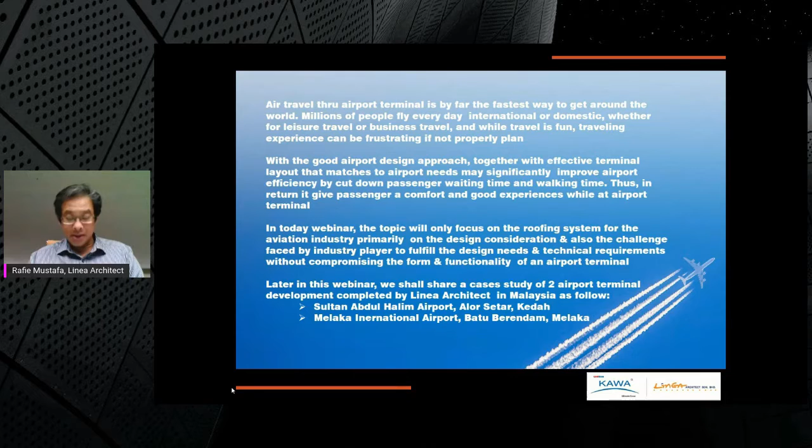Ladies and gentlemen, there are three subject matters to consider when choosing a metal roof system for an airport terminal building. One, to meet the architectural design requirements. Second, to meet the technical performance requirements. And last but not least, to be able to fulfill client requirements. Okay, first, let's go to the use of metal roof systems to meet the architectural design requirements. These are the considerations to look at, as you see on the slides.

First, the roof system is able to adapt to the architect's design needs, whether a tapered, curved, or straight roof design. In other words, metal roof is flexible to the design needs and the architect's design intent. Second, it is able to cater to a low roof pitch angle design, in other words, virtually flat, as minimum as a 1.5 degree pitch in some cases.

Third, the metal roof deck is capable of spanning continuously with fewer connections or joints. Fewer joints means high integrity and 100% watertight. Number four, another point to look at is aesthetics. It has a sleek, bold, expressive look, yet it has a good roof build-up system, and the important thing is it's economical. The next point I want to bring is that the roof is a lightweight system, but gives a strong, rigid, and lasting appearance.

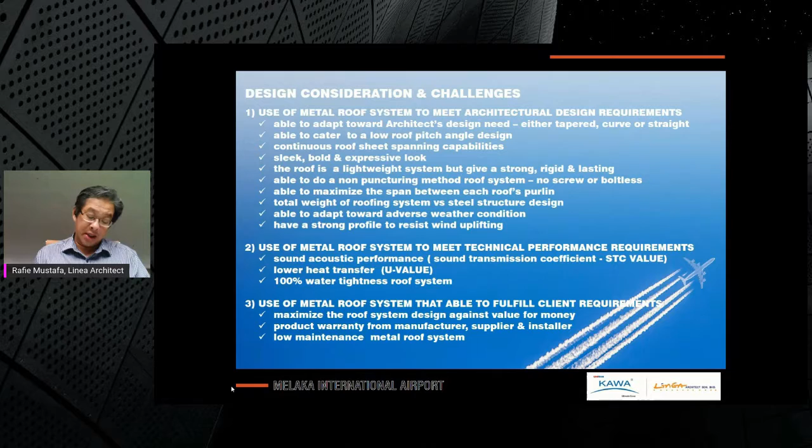With this, the right performance and configuration on roof build-up shall be able to bring comfort and safety towards the passenger, and also able to minimize the operation cost to the building operator, especially on electricity consumption.

And finally, the third subject matter to consider when choosing a metal roof system for airport terminal building is the use of a metal roof system that is able to fulfill the client's requirement. Here, I put 3 points to look at. First, it is able to optimize the roof system design value for money.

In other words, the right method and choice with an optimum design approach contribute to the economical and lighter weight of the roof system.

Second point that I want to bring up is a product warranty from manufacturers, suppliers, and installers, which gives a reliable, trusted source. These are things that the client looks at too.

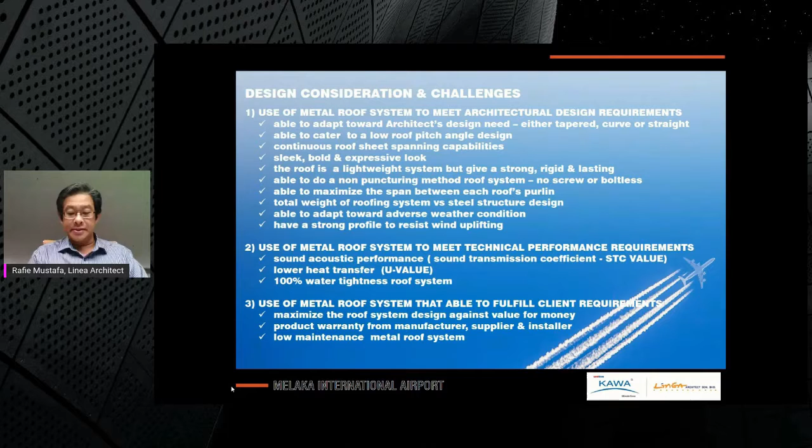And last but not least, another point I want to bring up is to have a low maintenance roof system. With three subject matters to consider when choosing a metal roof system for airport terminal - architect design intent, client requirements, together with technical performance - the benefit in return will give:

1. Save energy, 2. Give comfort, 3. Provide safety and security, 4. Minimize the maintenance, and lastly, optimize the design value for money.

On the next slide, I shall share 2 case studies of airport terminal development completed by our office, Linea Architect in Malaysia. First, as you see on the slide, the development of Sultan Abdul Halim Airport at Alor Setar, Kedah.

Completed at the end of year 2005, development was executed in 4 phases. Phase 1, earthworks and runway construction. Phase 2, construction of the air traffic control tower. Phase 3, construction of piling works for all buildings.

And phase 4, construction of the main terminal building, transfer corridor building, VVIP annex building, airport fire rescue service building, central utility building, landscape and infrastructures.

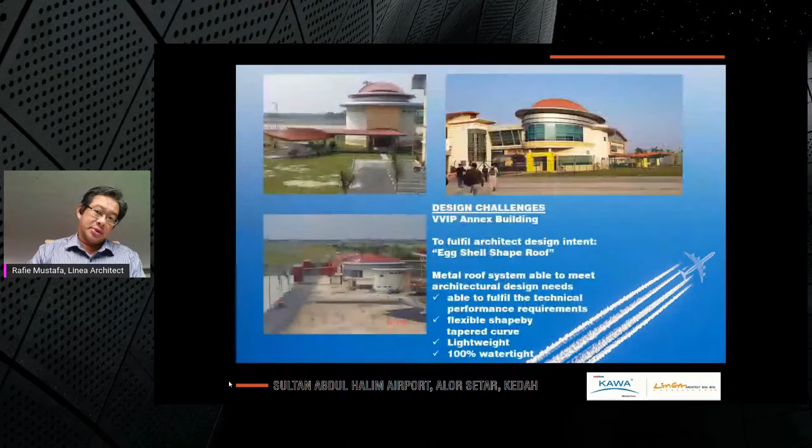Ladies and gentlemen, on the next slides I will share a photo of the VVIP Annex building at the Sultan Abdul Halim Airport Terminal. Here the architect has designed the roof shape as a totally different entity and exclusivity compared with other buildings, as you can tell by the name VVIP itself. So the approach by the architect was to design an eggshell-shaped roof, and this has given a challenge to choose the right type of roof profile and method of construction.

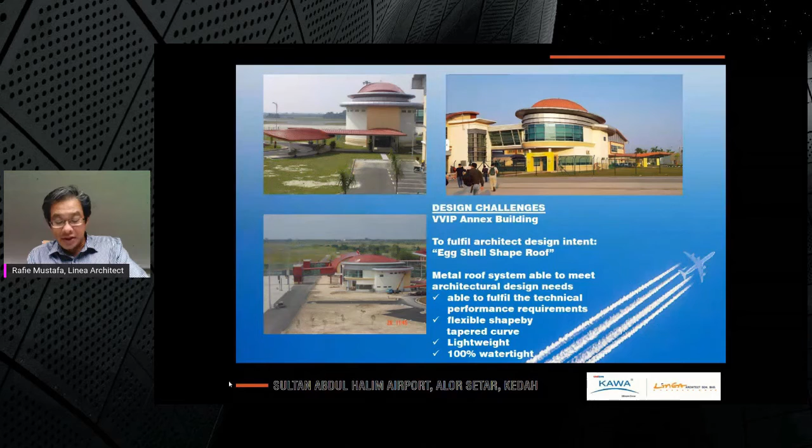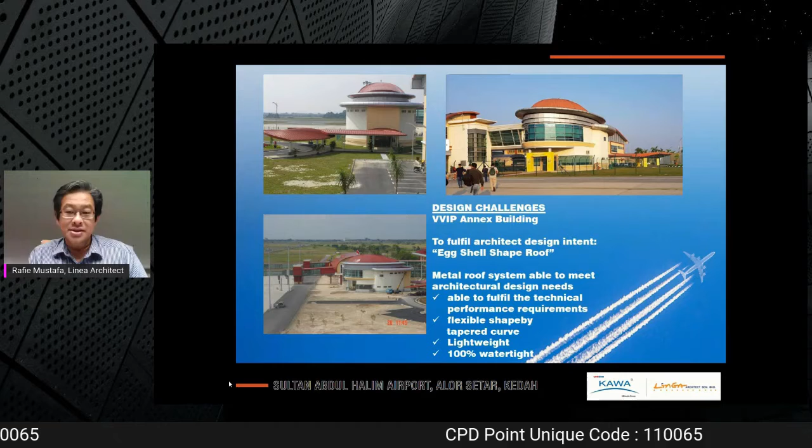However, again, with the flexibility of metal roof, it is able to be shaped and constructed in a tapered curve without having to compromise the performance of the build-up roof system, and importantly, give 100% watertightness. This has resulted in a very unique design, and the challenge is resolvable due to the flexibility of the metal itself.

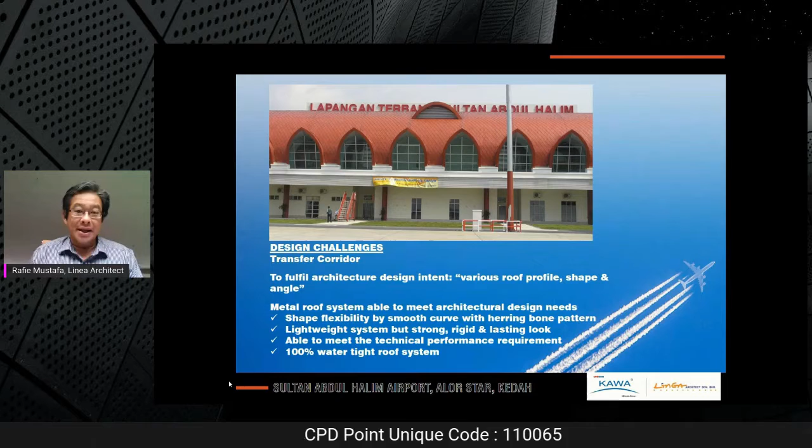Ladies and gentlemen, on the next slides I will show the photo of the transfer corridor building at the Sultan Abdul Halim Airport Terminal. Here, again, the architect has designed the roof shape in an extreme curve in many ways, and the roof surface, if you look at it properly, has a pattern like a herringbone design. This too has given a challenge to choose the right type of roof profile and method of construction.

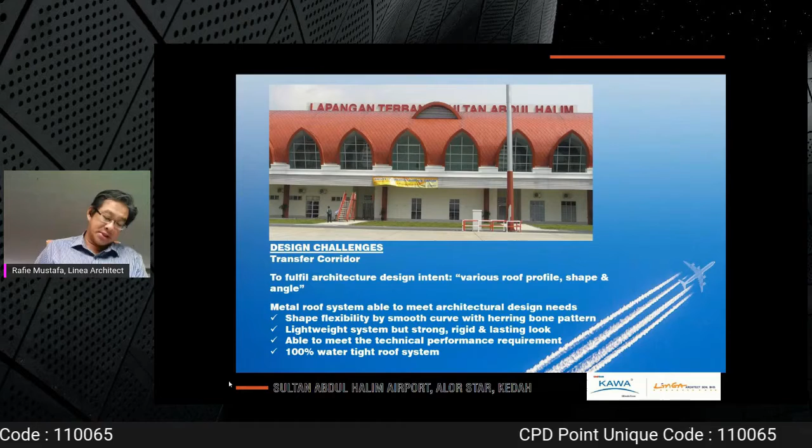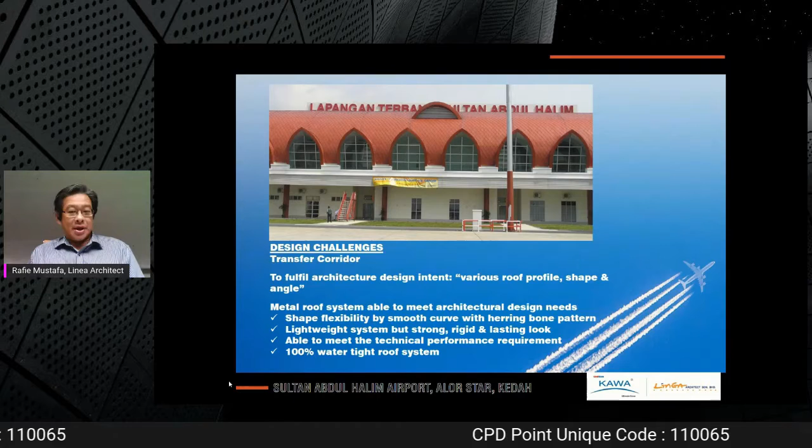Again, the flexibility of a metal roof allows it to be shaped and constructed in a curved shape without compromising the performance of the built-up roof system. And again, it gives 100% watertightness and has resulted in a unique building facade, when you approach or land at the Lapangan Terbang Sultan Abdul Halim.

Ladies and gentlemen, now on the next slide I will share the second case study of the airport terminal development, completed by Linea Architect in Malaysia, which is the development of Batu Berendam in Melaka, completed at the end of the second quarter of year 2009. The construction consists of the development of the new main terminal building, the air traffic control tower, airport fire rescue service building (AFRS), meteorology building, airport runway, and also the landscape and infrastructure.

Ladies and gentlemen, this is the aerial photo of the Melaka International Airport Terminal. The architect's design approach on the roof is to have a dynamic, sleek, strong, bold outlook, like an aircraft wing, and at the same time having a low-pitch roof angle.

With this design intent by the architects, it has given a challenge to choose the right type of roof system, and in summary, the metal roof system is the right method and choice to fulfill the architect's design intent during the course of design development as well as during construction.

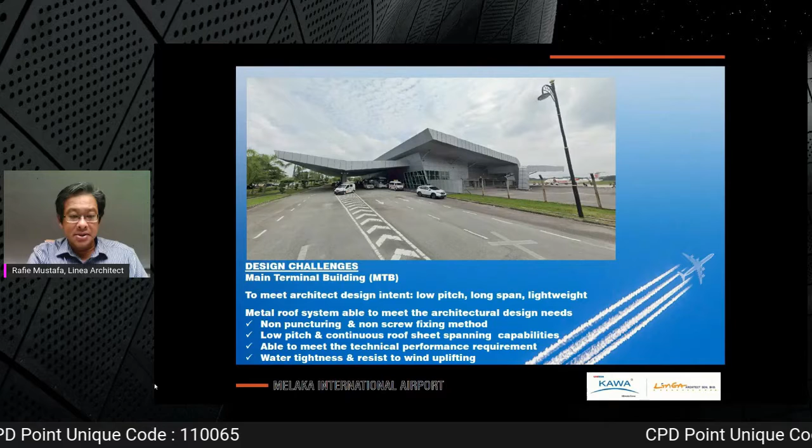The next slide shows the side view of the main terminal building of the international airport. Like I said, it is able to meet the architect's design needs. The next slide shows a closer look of the terminal entrance porch, which has a long, wide roof span that is able to cater to multiple vehicle lanes below the roof.

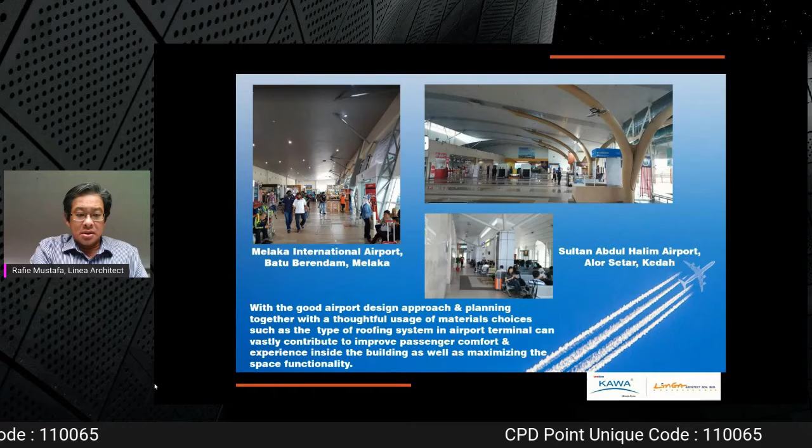Ladies and gentlemen, as a summary, for Melaka International Airport, Batu Berendam Melaka, and Sultan Abdul Halim Airport, Alor Setar Kedah, with the good airport design approach and planning, together with a thoughtful usage of material choice, such as the type of roofing system in airport terminals, this can vastly contribute to improved passenger comfort and experience inside the building, as well as maximizing space functionality.

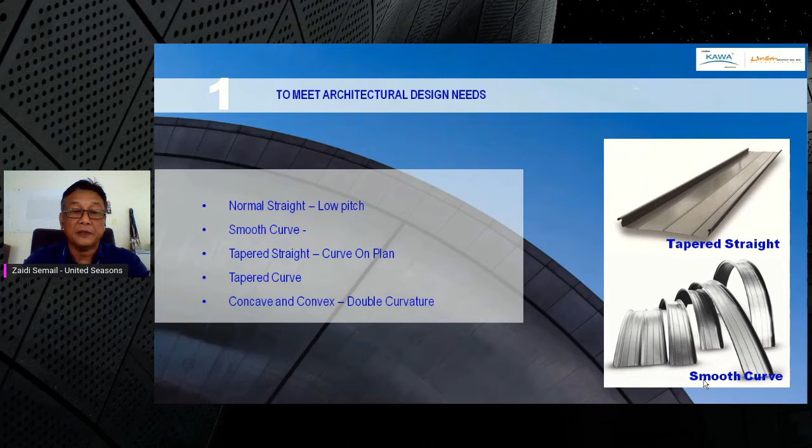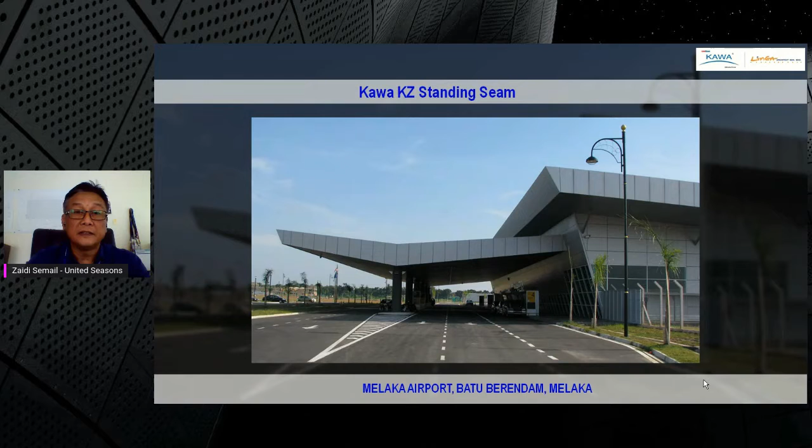This is the Kawa standing seam on Malacca Airport, the project we did with Encik Rafie, which is a very flat 2-degree pitch at 60-meter length. For example, we also have the Area Sultan Abdul Halim Airport in Kedah, which is a smooth curve with double curvature, and also has a very good STC and U value, which we'll talk about towards the end.

This is a smooth curve standing seam on a China Airline building. So architects would like to see something smooth, not this crimping, factory look-alike. So this is a better choice for all this design in the airport or industries.

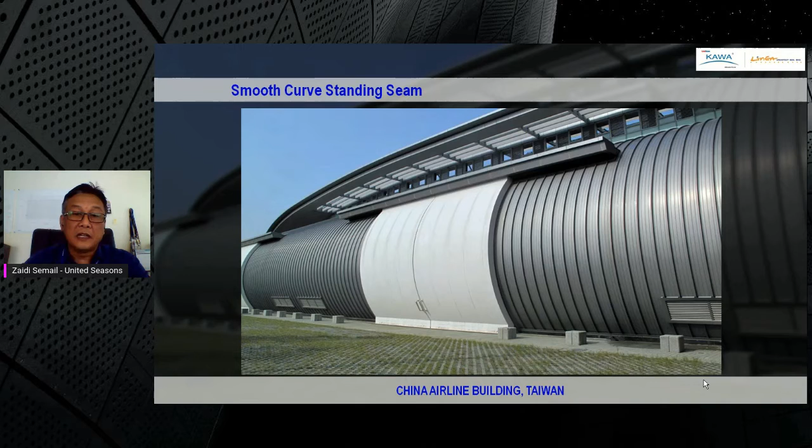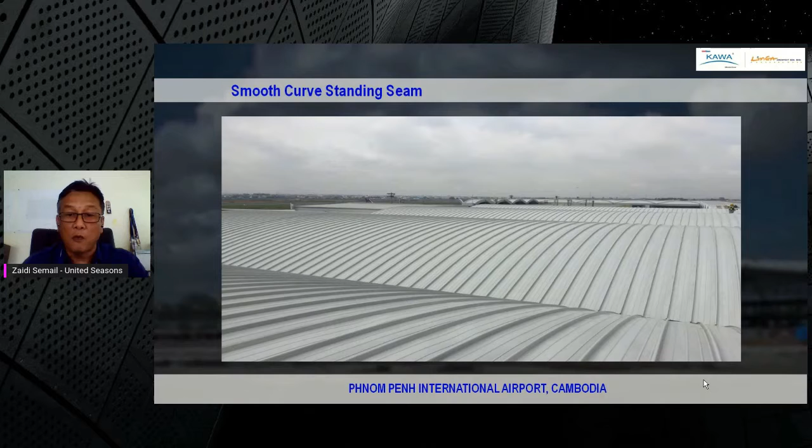Another photo of curved roofing on a building. I think just to let you know, most of the curve or long span is clearly better because there are no joints and no puncturing through, and it will have a very good flow of water at the end of the design itself.

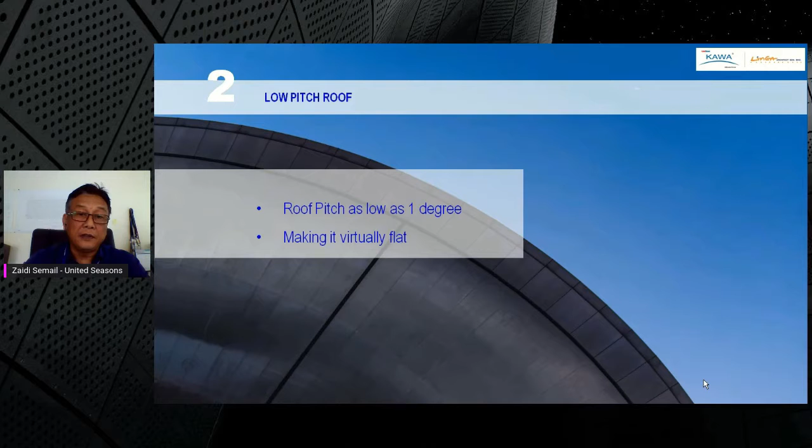Okay, low pitch roof. As mentioned by Encik Rafie just now, it's very important to have a low pitch roof, making it virtually flat. The reason you have to do this is that you must be able to use a product that's able to take care of the amount of water that flows on the roof itself before it reaches the gutters or beyond the roof itself.

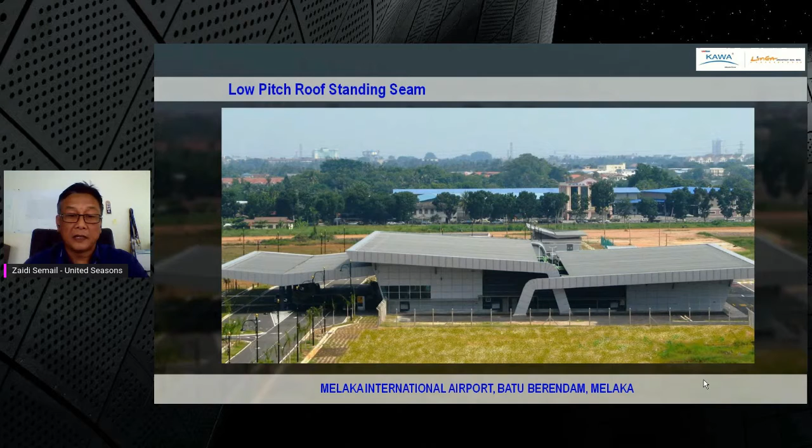All right, so low pitch. This is the section of the Melaka Airport, a low pitch roof. As you know, it's a 3-degree pitch, spanning around 60 meters, if I remember correctly. So it has to be able to take the amount of water in Melaka itself when it rains, before it moves to the gutter or the water collection.

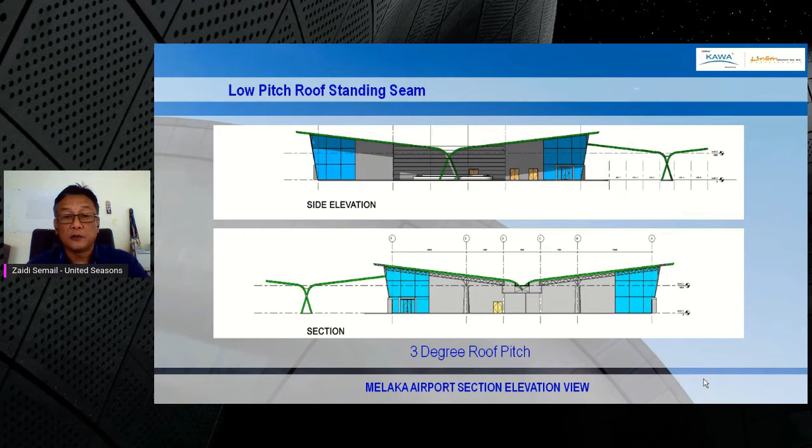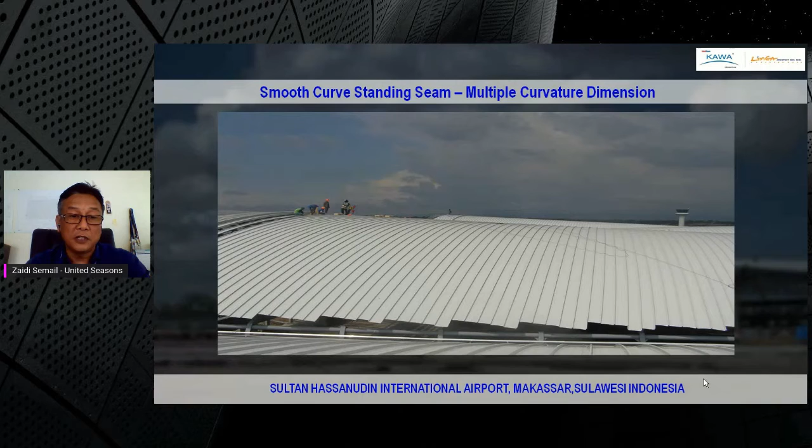I really like this smooth curve standing seam. I put there multiple curvature dimension because this is one of the designs in Sultan Hassanudin International Airport. When they design a conical shape, if you notice in the photos, every 5 pieces we have to change the radius just to meet the design of the architect. Moral of the story, listen to the architect.

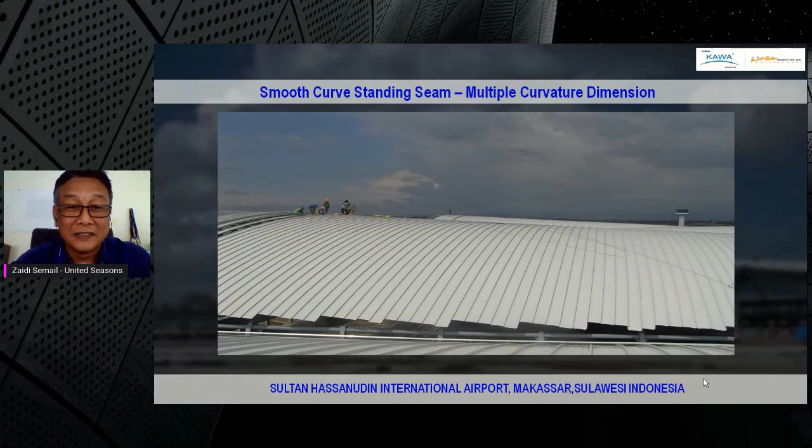All right. So continuous long length roof. Most of the time, architects don't like the roof that they design to have joints or a lot of cuttings, that kind of things. It is to eliminate the possibility of leaking as much as possible. And we have to produce one single piece, eave to eave, what we call it.

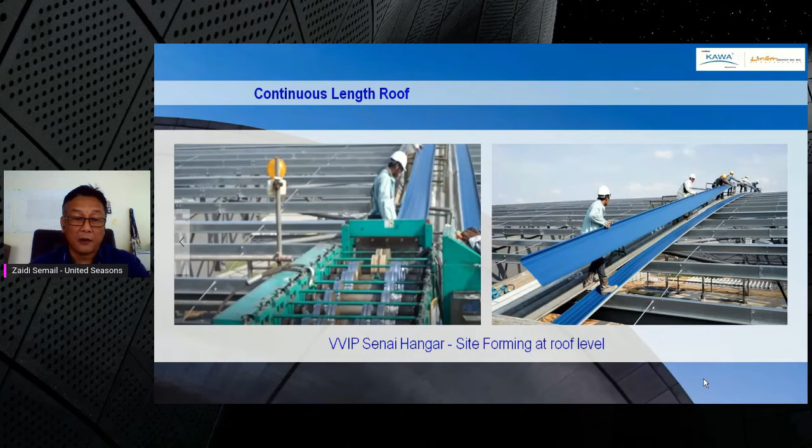Everybody was asking once in a while how did you manage to do long length roof at 96 meters, 60 meters, 161 meters. This is how you look at the site, and you have to bring the machine to the site and produce the roof at the roof level, in this case for the length required for the particular building.

All right, this is how it looked like. Forget about the difficulties, but this is how it looked like at the end. This building, if I'm not wrong, is about 92 meters in length from eave to eave, without any joints, in a one piece roofing system.

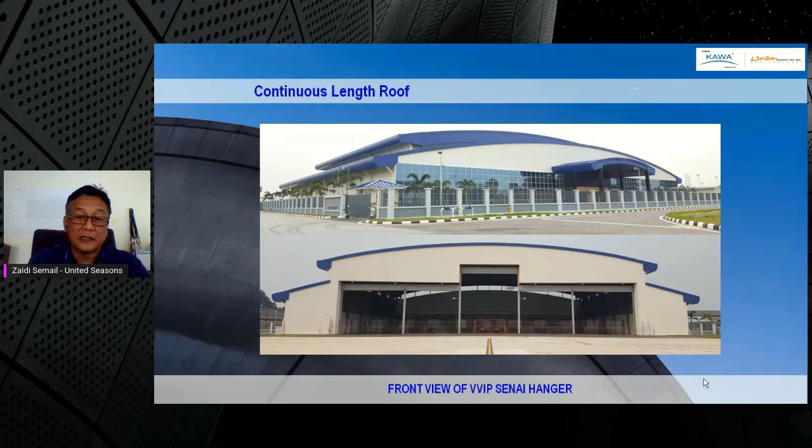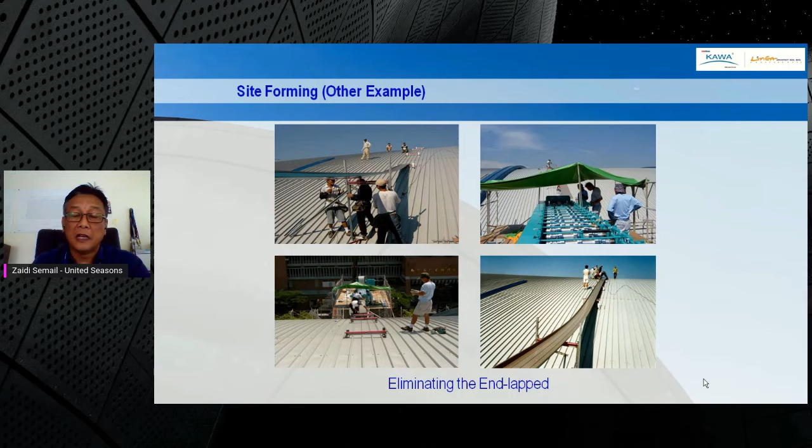I see another example of site forming. Sorry. Right. Okay, this is an example of what we said, that most of the time site forming is eliminating the end lap, so that you have one full piece of roof, again eliminating 100% the possibility of leaking. Okay, this one is complete.

Well, when we talk about roofing, we have a few systems that I want to talk about in this industry. We're talking about concealed fixing, or most of the time people say boltless system. I'm not sure what the boltless is about. We use bolts, so it's not boltless. There are a few criteria that you should look into.

One, what we call standing seam. In some cases we call it lock seam. It depends on the building and the product that we're going to use for the particular building. And most of the time, when you have a very low pitch, you're going to have a very deep corrugation, or what you call high rib single pan roof. Let's go one by one.

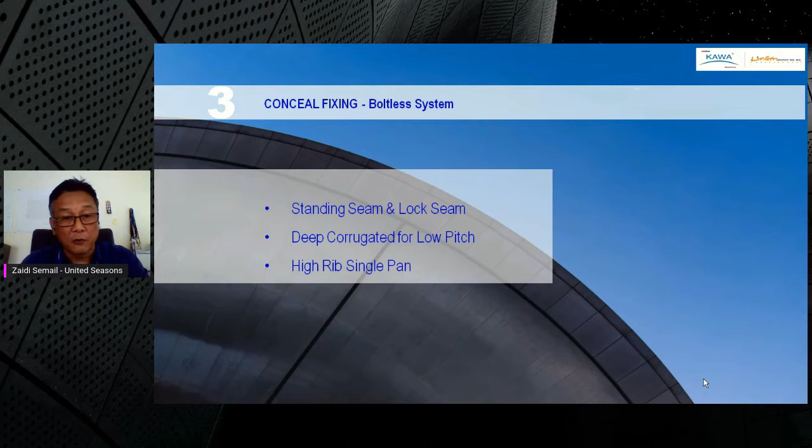Yeah. So one of the items, on our side at United Seasons or Kawa, we call it Kawa standing seam. Actually it is a non-puncturing boltless roof system, where there is no puncturing through of any connection for the roof. It's a lock seam to ensure watertight roofing. It's also light but strong.

We have done this roof up to 122 meters in a certain project. It works well with heavy rainfall in a tropical country like us, or the torrential rain that we have right now. We did have flooding yesterday. Yeah.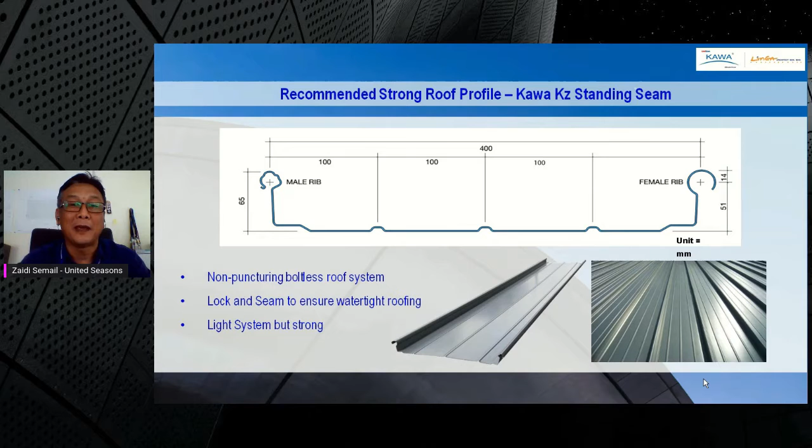Then, the other strong roof that we have is the Kawa Lock Seam. This is for supporting buildings like hangars and that kind of building. So it has a very bold and deep corrugation to make sure it is able to span and also to cater for the rainfall that we have at the moment.

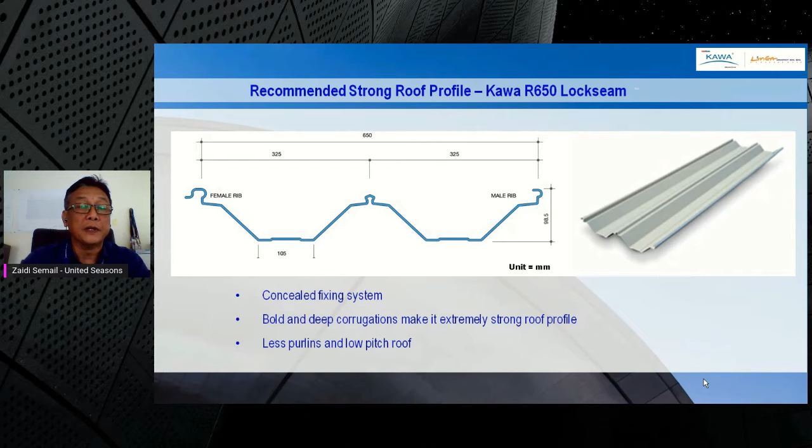Last but not least, one of the deepest that we have, sorry, I saw the jump. Okay, one of the deepest that we have, we call it Kawa R500 lock seam. You have about 160 depth of corrugation. We have successfully installed a project at 161 meters at 1.5 degree pitch. And to make things even more interesting, because of the strength of the product, the support for the particular building is every 5 meters.

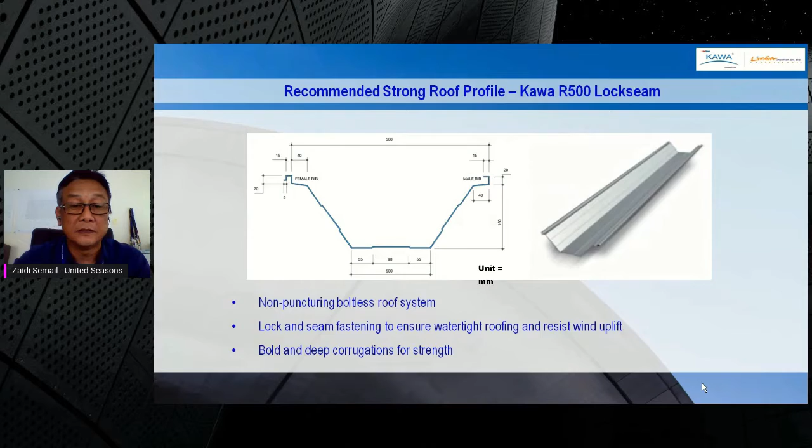All right, I think this is the most important thing, and we have a lot of misconceptions on this particular subject. One is the acoustic performance, the other one is the heat performance. I used to be asked which one is more important. So basically, both are important.

To make it a very simple terminology, most of the time, if you have acoustic performance, you automatically have your heat performance. But of course, it depends on how you actually install the system properly and get things done properly with good calculation and testing. Let's go one by one.

Now, everybody knows that in the airport, like Rafi was saying, it has to be a good vibe. You're waiting for your flight, not to be noisy and that kind of thing. So let's understand how sound travels. Sound travels three-dimensionally, but there is one that you can actually reflect. Reflection means it can reflect on a hard surface, which creates an echo, which is not so nice when you can't actually hear your announcement at the airport.

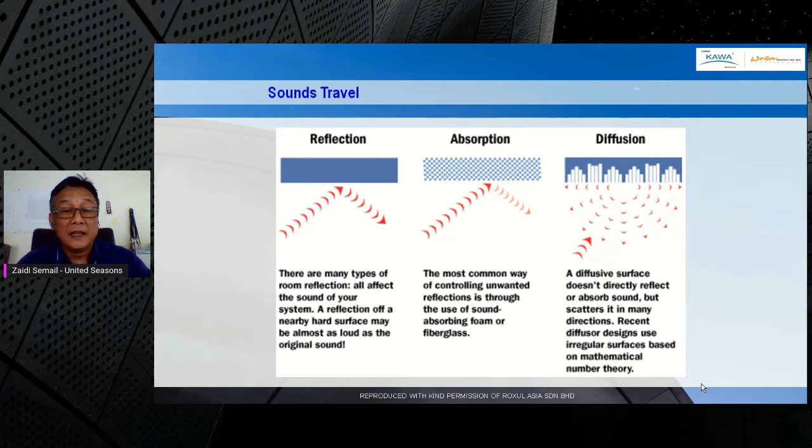The other one is absorption, where you actually absorb the sound. A good example is your cinema. Diffusion: a diffuse surface does not directly absorb the sound and also does not reflect it, and the sound is just dispersed by itself. So it's a bit of a technical thing, but basically you know where I'm coming from. Right. So let's understand how it works in the airport or in an aviation building.

If you are in the airport and you don't have very good insulation or a good system on your STC, this is what happens. Let's listen to the sound, if you can hear properly. Most of the time when an aircraft is taking off, it creates about 90 dB to 110 dB of sound. Let's see what it is like. It's a very high frequency sound, right? This is the outside.

Most of the time you don't hear it on the inside. But imagine if your airport does not have insulation. This is what you'll be hearing from the inside, right? Some of the aircraft will be taking off about 90 seconds apart. It's going to be very noisy.

But if you have good insulation, in this case STC 43, 41 here, but in the Malacca Airport and Kedah Airport, Rafi required STC 43. Let's see, this is the original sound of the take-off, right? Then this is the sound when you're in the airport. It reduces a lot of sound, and you're going to have comfort in the airport, even with your flight delay, which everybody hates, right?

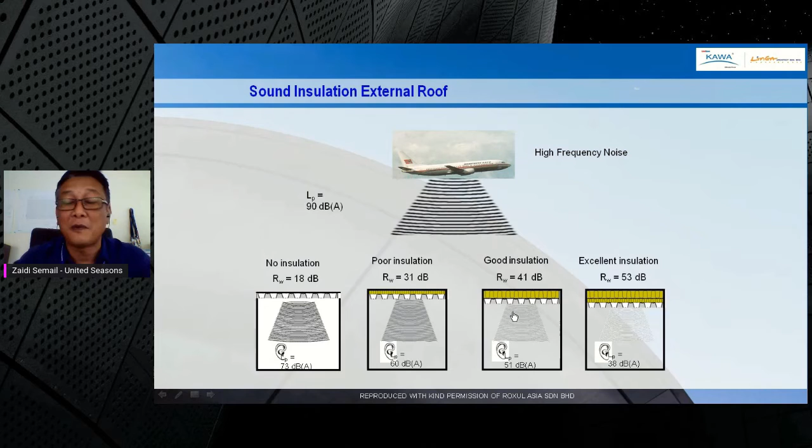So the other thing that we're going to talk about is sound absorption. When you are in the airport, there are a lot of announcements, a lot of information they're going to give. Imagine if your airport does not have good insulation and doesn't absorb the sound. This is how the announcement will sound without any absorption being done by the ceiling or the roof side.

Right, there'll be a lot of echoes, so some people might miss the flight, that kind of thing. But if you have good insulation on the roof, because the roof is the biggest element in the building, you can have a perforated steel deck to absorb the sound. And where is my... yeah, it would be something like this.

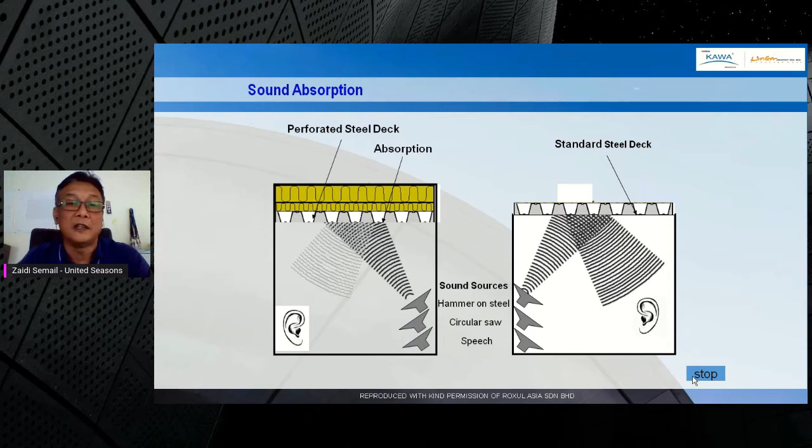Right. This is what we call the sound absorption requirement in an airport building. It's very important so that you don't miss your flight by not hearing the announcement. Yeah. Okay. The other subject that people talk about is sound absorption. How does it work? Basically, it's quite easy.

You're going to have sound of about 80 dB on one side, on my left, and then you have an STC 39 door, what we call sound transmission class or sound transmission coefficient 39. Then in the receiving room, at the end of the room, you're going to have about 41 dB, which is less loud than you could think of. This is a simple concept or example. That's how sound works. Yeah.

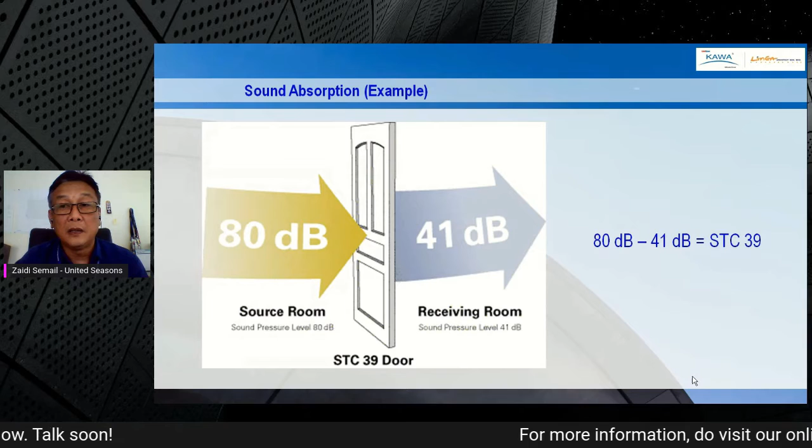Okay. So in order for you to have that STC value, sound works in a very unique way. For example, we have INSUL programming, which can actually simulate or calculate the potential STC that you're going to have. We have an STC 43 build-up here. You're going to have a roof.

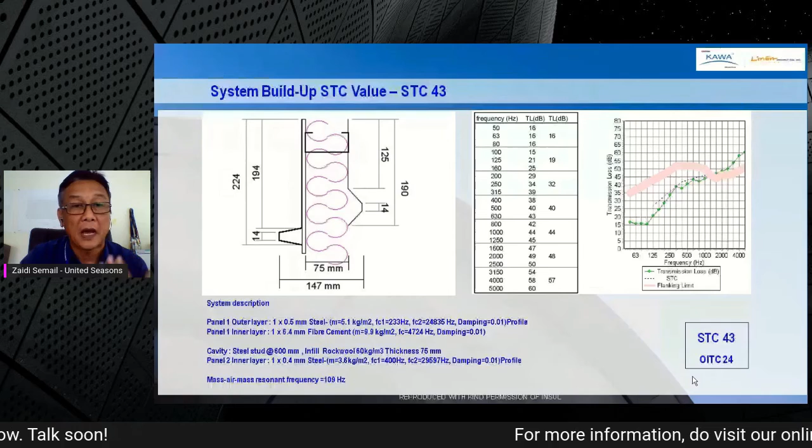You're going to have a fiber cement. You're going to have an uncompressed rock wool, in this case 60 kg at 75 mm, and you can have another layer of roof at the bottom. So it will give you more or less something like STC 43, but in an actual test probably plus or minus 3 or 4. It should not be a difficult thing to get. Just a simple example of how you create a system build-up.

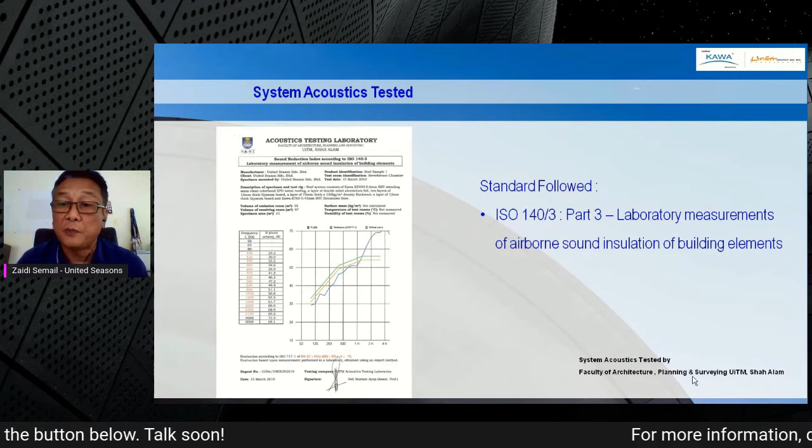Okay, of course, acoustic system. Also, you have to test to a certain standard. In our case, we always use ISO 140 part 3. So this is what we call a laboratory measurement of airborne sound insulation of building elements.

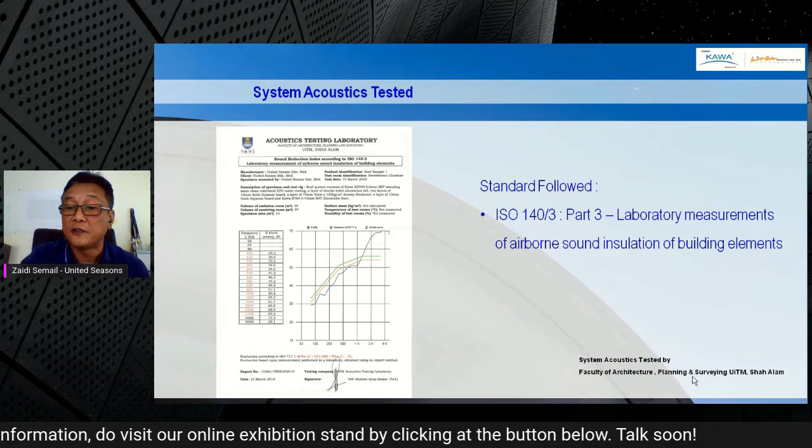This is a thank you from the Faculty of Architecture, Planning and Surveying, UiTM Shah Alam, that we have worked with. The other part that you have to follow, actually, is ISO 717-1 part 1, airborne sound insulation in a building for interior building elements, to determine the Rw or sound.

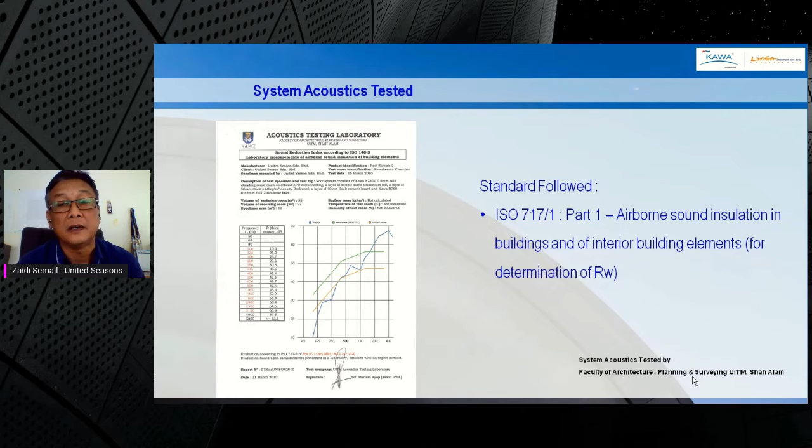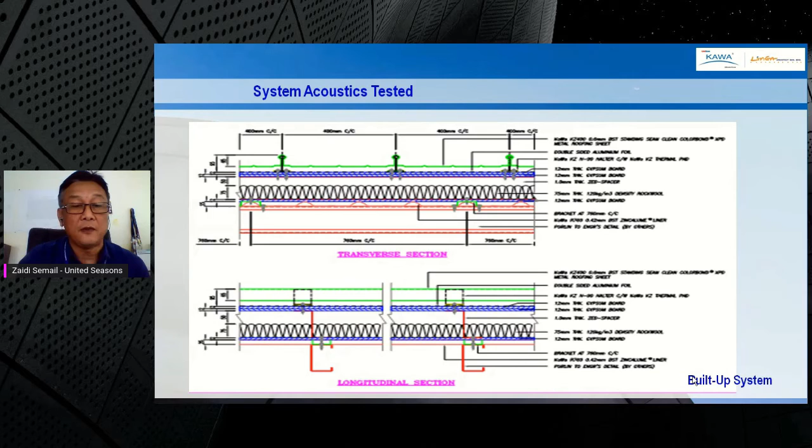All right. So system acoustic test, actually, when you come to a build-up system, you actually have a system build-up. Then you're going to have a chamber. Then you're going to do a mock-up, an actual mock-up. Then the sound is tested, for you to get the actual result at the end.

Right. The next thing that we do, as I said, the STC will come with the U value, but everybody was confused what is the U value. And lately I have seen a specification that specified the U value on a product, I mean an insulation product. It is not the way it works. I mean, if you look, the U value is a measurement to express the heat loss factor of a material. So the U value normally comes in a unit of watt per meter square Kelvin or Celsius.

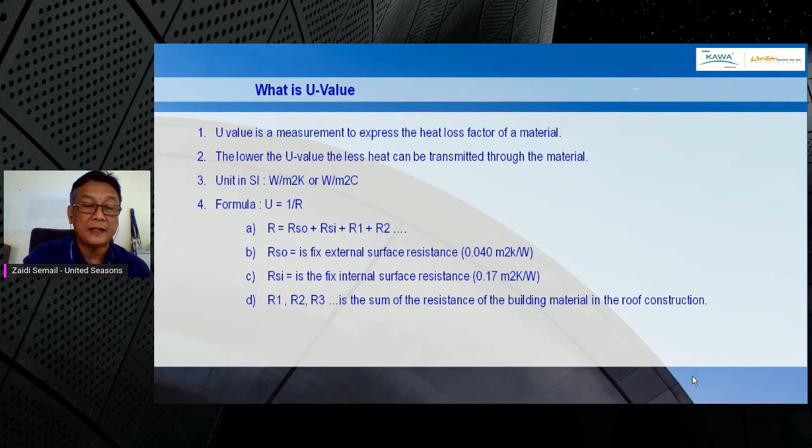In this case, a bit of formula here and there. But the thing is, the U value is calculated as a system. You don't calculate a U value in a single product. So let's get a bit more informative on this one. This is one of the calculations of U value, which basically has no insulation. Before I forget, the bigger the number on U value, the no good you are. All right. So it doesn't mean the bigger the better; the bigger the number is not good.

Okay, in this case, you're talking about metal roofing without insulation, where you have your external surface, steel decking, cavity, sisalation, plasterboard, and then the internal space. So most of the time, when you do a calculation, the thickness is important, and the R value is important. In this case, the thermal conductivity, depending on the product or the system that you use.

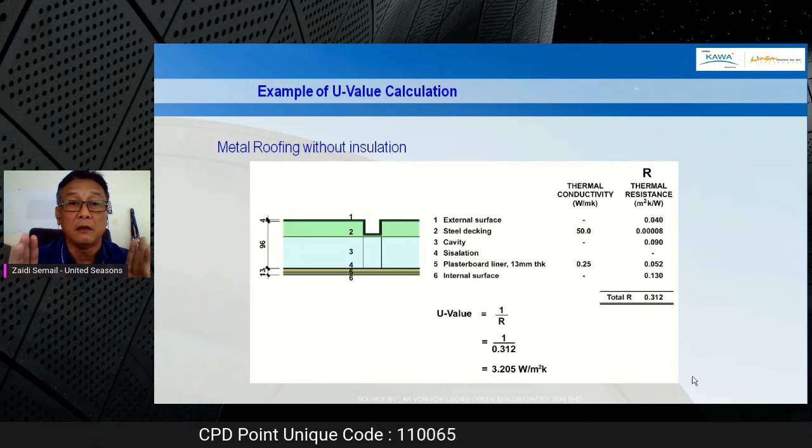A quick one, this calculation has created 3.205 watt per meter square Kelvin, which is no good. It's zero insulation. You are depending on your plasterboard liner at 13 mm, which is not good. You're going to be very hot in your building, in your room, in the airport or whatsoever.

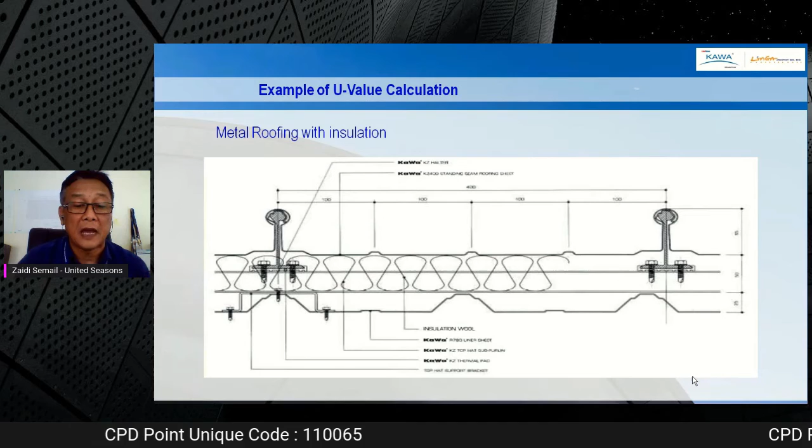So again, let's go back to metal roofing insulation. If you know that you have a metal roofing, you have insulation, and you have liners at the bottom, it gives you a lot of thermal resistance against heat outside the building. Let's see how a calculation has been done. Okay, this is the build-up. Actually, it was done in Kedah Airport, if I remember correctly, and also Malacca Airport. So what we need to have actually is a very low U value.

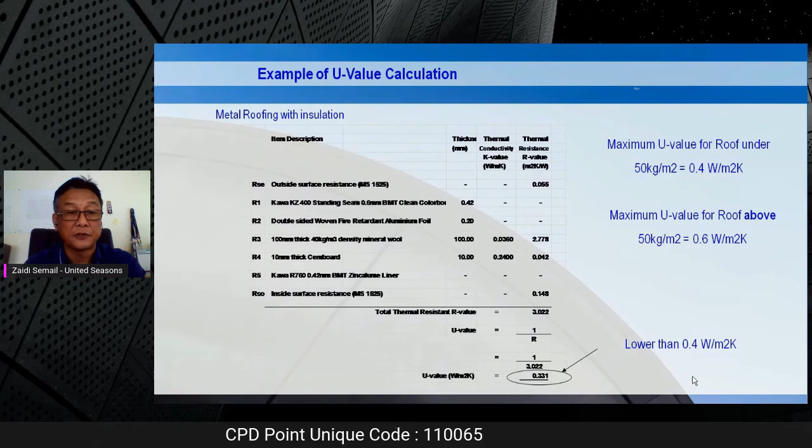For example, the item on the top of the calculation and below the section is the inside surface resistance, referred to MS1525. Basically, it's constant, and you have a roof at 0.6, and you have a double-sided aluminum foil, and we do have an insulation fiber at 100 thick at 40 kg. We use a cement board to reduce the height of the build-up, just to get the numbers right. So the idea is to get as low as possible with minimum cost to some extent.

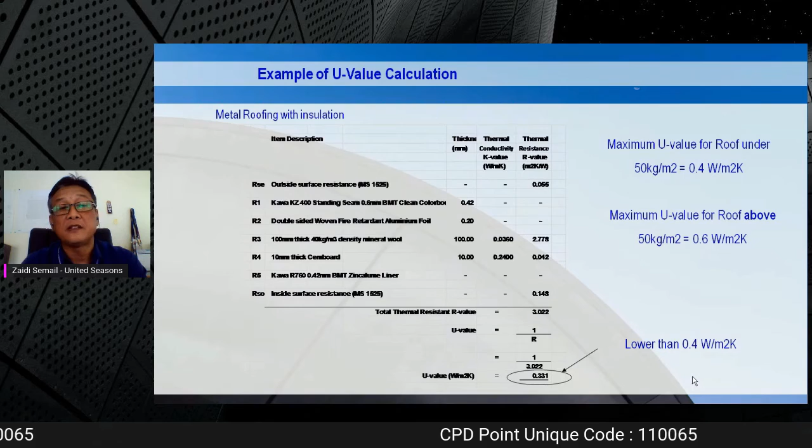This is a technique that everybody has to learn at the end of the day with the experience that we have. So in Malacca Airport and Kedah Airport, the U value is 0.331. We're talking about just now 3 point something against 0.331. This is a good U value, and it also gives you a very good sense of STC level towards the end of the design.

Okay, let's share a bit more.

All right, so having said that, that is all the things that are required in a building for the aviation industry. It might not be so much STC in your hangars or whatsoever, but it does have a relationship with all this information that is required for that particular industry.